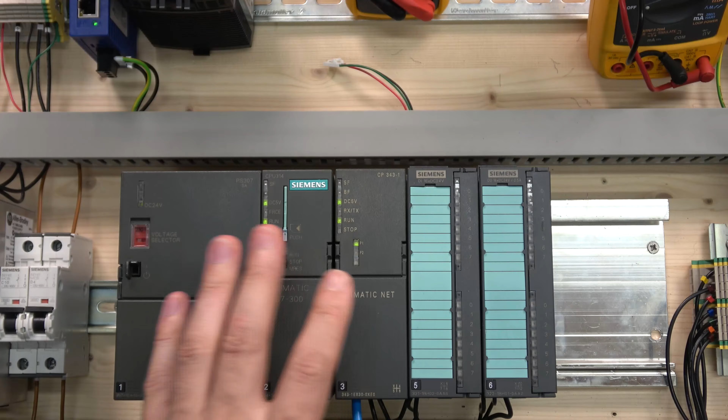Before we get cracking with this in the TIA portal, let's quickly have a look at what the card is all about. This card itself is going to require its own 24 volt DC supply, and it's got 2 ports right here. Both of them work pretty much independently, and can be turned on and off within the TIA portal. One thing you definitely need is your MAC address in here, which you'll be able to read out once you start at the very beginning of the startup.

And this is your version. As you can see, my version here says V2.0. That V2.0 is no longer there because I have already updated this to 3.0, and we're going to be doing one more update in a minute to the latest version, because you have to do 2.4, then you do the 3, and then you're able to do the 3.13 or something like that.

So then you have lights in here. SF is a general group error, so it will pop up with general group issues. BF is going to be your bus faults and Ethernet interfaces - these will show if there's any problems with the end or setups. Also you have RXTX, which shows you when it's communicating, and run, stop, self-explanatory. P1 and P2, as you can see, P1 is flashing because that's where my Ethernet is plugged in. It's showing you which one is working, which one is not.

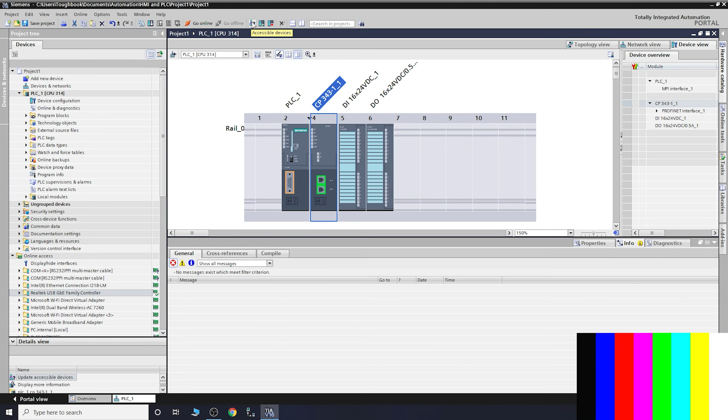We go into accessible nodes right here on the top, click search and find out what the IP address is. As you can see, the IP address at the moment is 172.24.69.221. We're going to be changing that because this is what I was doing on my work - I was working on some of the networking down there. I'm no longer going to need that, so we're going to be changing it in a minute.

Click on show. When you click on show, it will appear right here at the bottom under the online accesses. So in here, just go double click on your diagnostics, and in here you'll be able to find out what the current firmware version is within your CP343 unit. As you can see, mine is 3.0.23. So when you do your hardware configuration right in here, double click on it.

Right here on the bottom, it's going to tell you what you have selected for your hardware configuration. If by any chance your firmware version is not right, just click change the version. I'll show you in a minute how many versions are out there.

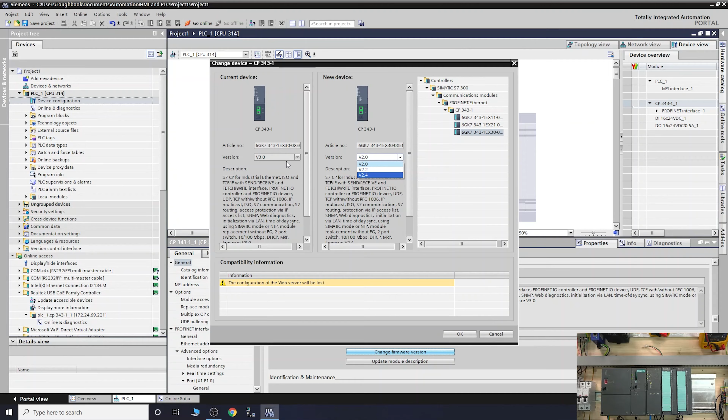There's an option in here. As you can see, mine at the beginning was a 2, and I'll admit I made a mistake - mine was at 2 but I had actually selected 3, and all my ports were locking out all the time. They were not working properly, and I had all sorts of problems until I figured out I completely forgot to make sure the firmware version is correct.

So don't forget it. Once you want to update it, you can just click OK and it will update it. At the moment we are on firmware version 3.0, which is correct. So we are good in here.

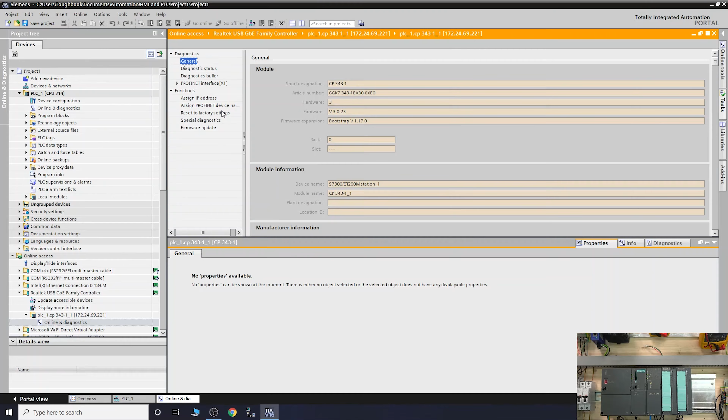Next, if you go into online access and online diagnostics, right in here you can do firmware update, which you're going to do in a minute. You can do your factory resets and everything you want, and also you can assign IP. When you assign IP in here, it's good only for the very beginning. I usually do this at the very beginning and don't do it again, because it's advisable to change your IP address within the configuration itself, which is right here.

So if you click on general... where do we go? We clicked the wrong one. So if we are in here, then our Ethernet address is down here. This is pretty much the Ethernet address down here.

So edit your address in here. That's what we're going to do now. This is preparation for the next video as well. 168, because we're going to be setting this up so we're able to connect. This is what this card is really brilliant about. Once it's fully set up and integrated within your network, obviously you do need to make sure there's all the protections and things like that in there as well.

So which you can - where is this? Somewhere in here, I can't remember, but you do need to put passwords onto your program so nothing can be changed. Let's give him subnet 2, let's give him an address no one's using, to make sure your address isn't conflicting with anything else. If it does, you will have a BF error coming up, and also an SF error, saying it's conflicting, and you'll have a bit of trouble. So it's good to know what IPs are used.

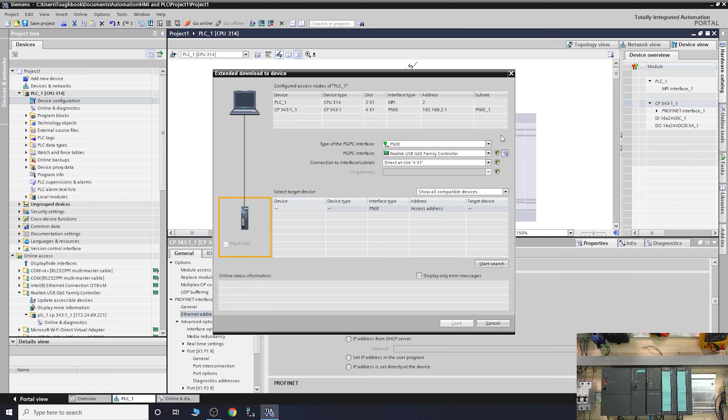I need that one. Once I did that, you're pretty much good to go. So what we're going to do is click in here - we're going to load that new IP address into our card itself. Everything's already selected for me in here. Let's search, and we're going to show all compatible devices, and there's an IP address down here. What it's going to do now is literally override the existing IP to a new one.

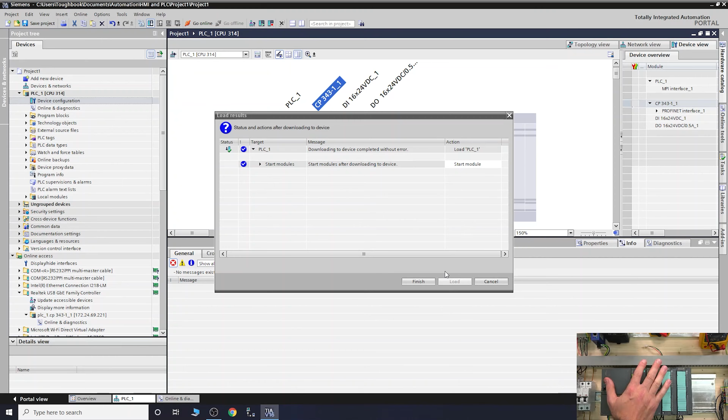Doing his business. Again, my MPI controller is not even connected, so I'm literally communicating with my CPU directly. Let's load that in. As you can see, I haven't done any protection, guys - you do need to select your protections and things like that. Make sure no one, because the one thing that comes with this Ethernet unit is that once it's connected to your network, pretty much your protections aren't there. Anybody can have access to it, whoever's got the software or is online. So let's finish loading that one.

Once we've done that, if you see now, when we go into the accessible nodes and search, it is 192.168.2.1. If you had changed it there at the very beginning and forgot to change it in configuration, it will automatically override whatever you did at the very beginning. So do check this out, because this card now is effectively ready to go - it's all set up, and in here you can start setting up all the small details.

Again, all of this is very much dependent on your setups and module access protection level. Status independent, I don't even know what that is, but we're not going to check that one. Oh, it's doing... you don't want that one.

So the one in here, what you can do is... okay, there's so many different things you can do with it. So interface options, guys, do check it out yourselves. I want to show you something. Where was it? I completely forgot. Where is it?

IP access protection: here you can select the addresses who's able to connect with what kind of IPs and all sorts of things like that. So that's that kind of thing, more or less for the more static IPs. So yeah, all this I'll let you guys check out.

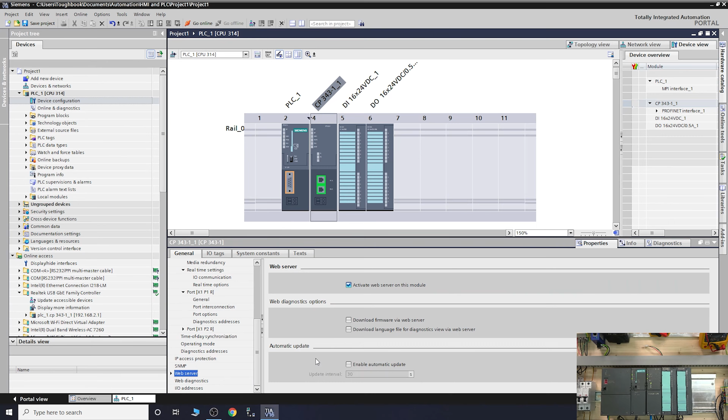The next thing we're going to do is when we go on the web server, which you're going to be checking out in the next video. There's a couple options: activate web server on this module. Web server is really good if you want to connect to the actual CPU and have a look at the diagnostics and all other business you want to do. I can show in the next video. You can even do it from your tablet or your phone. We'll check that out in the next video.

Then you can actually download firmware with your web server. I'm not going to select this now. Actually, I will. Actually, we will select that, because we'll check that out in the next video as well. Come on, here we go. And then automatic - we're not going to do that either.

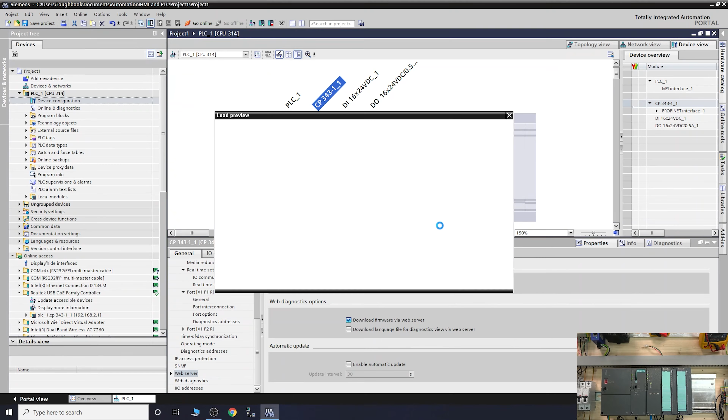So once we've done that, because I did that, I'm going to load that in now again. Come on, again it's giving me a warning saying that I haven't set up any protections. I know, not for this video. It's fully up to the individual how they set up the protections, how to protect their CPUs. So this is just a demonstration of what the card itself is.

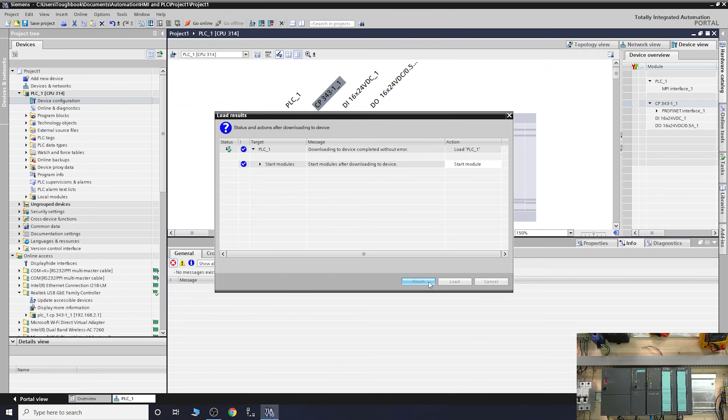And when you want to set this card up, what I'm going to do now is plug my ethernet in, my internet in, and I will unplug my cable from... actually I can't do it because I can't reach to connect it to the network, so we're not going to do that now. We're going to do that in the next video. Because I would need to connect the actual card itself to the actual network, which at the moment my network is a little bit too far.

So next up, let's do the firmware update, because that's the one thing I want to do. And for that, we need to go into Google. Once that is done, let me just see, make sure we are still recording. We are. Was that done? So we're gonna do it. It's gonna be a CP... what is it called?

CP343. It's always good to update your cards, guys, because there's a lot of things they add and sometimes they remove, but it's always good to update them to the latest whatever they've done. So once you find your product, which this is my product, it's quite easy to find. This basically will take you to the Siemens Mall. In the Siemens Mall, we are going to go for downloads.

For whatever reason, we have wireless. That is actually... I still can't connect. We'll check that out in the next video. I literally now can unplug my CPU because I am part of the network. I should be able to connect even wirelessly and do all my stuff that I need.

So what I'm going to do, I'm going to click the downloads in there. I think, do I have it? Do I have it? Do I already have it?

Yes, I already have it, because I was going to pause it since I have to go through the acceptance terms and all that. So basically you download it right in here.

So if you download firmware, click in here. We are using the standard version, yes. Already downloaded, so go through this process and download this file. You're going to get this file right here, which is a CP3 file. We get it as a zip file. So in this folder, I'm going to remove the old one, which was the last update I did.

By the way, you can do this via the web server too. We're going to check that out in the next video.

So we're going to drag these two files right in here. I'm trying to do this as fast as I can. Hopefully you guys are keeping up if you're doing the same thing.

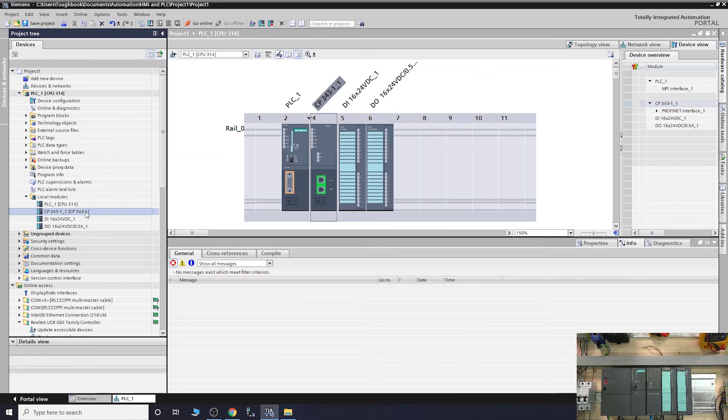So then we're going to go into the accessible devices again. We have to connect to it. Actually, can we do it right down here? I'm not sure, because I've already done it. Local modules, CP - let's right click on it, then go into diagnostics. So there you go, we can do it through here.

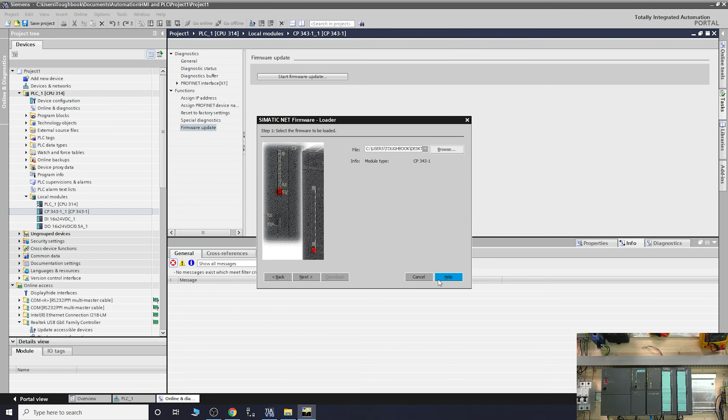So then we go to firmware update, start firmware update. Make sure you are offline, because it doesn't like you being online. So let's browse and find the file we are looking for. That's the one, we click it, then click next.

Is that our MAC address? Yeah, that's it. So then we need to select how we are talking to this device, which is my family controller. And then we go into download. If all goes well, it's going to create the hardware version.

If all goes well, it's going to go straight into the loading segment. From there on, let me pause here and let it do all of its business. It could take about 4 to 5 minutes while it does the full update now.

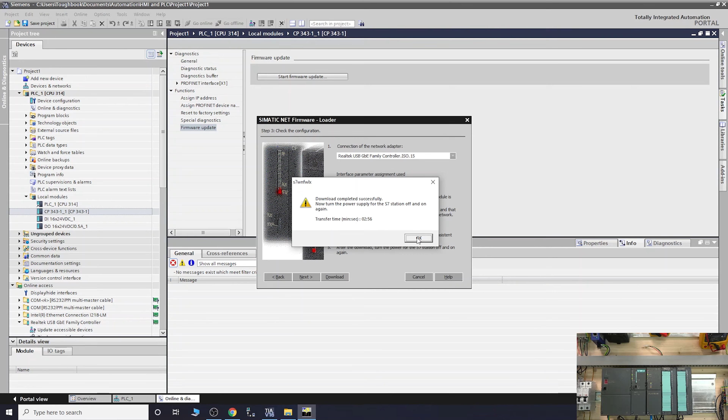Here we are, so once that's done, you're going to see a message like that. If all went well, you'll see 'download complete successful.' It tells you to turn the power supply of the S7-300 off and on, basically reset the system. So let's cancel that one out.

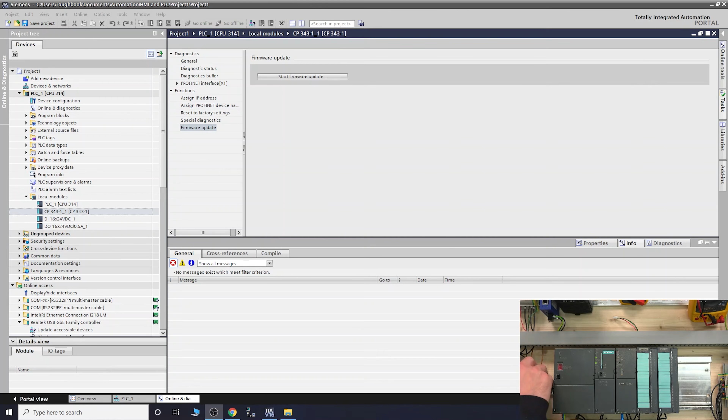Let me drag the screen here so you can see the system flashing down there. It's requesting a restart. So shut it down, there you go, and put it back on as it does that.

So we quickly want to check - there's one thing I didn't check. Do I need to change the configuration in my device as well? Let's double click on that and go into general settings. Let's go down - I don't think you do, because I don't think there was any more.

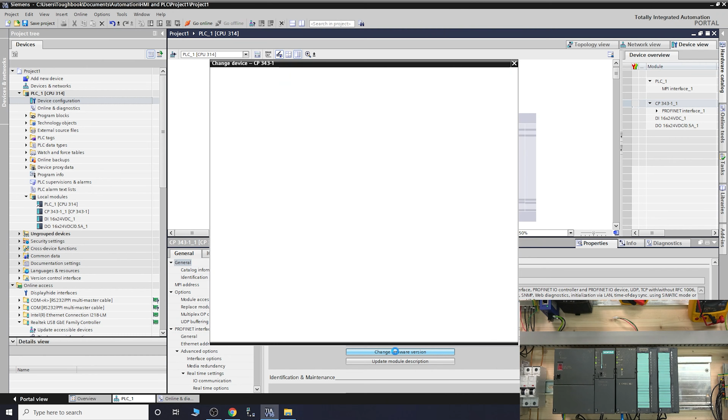So change the firmware version to 3. Now we're good, you don't have to change anything. So past 3, that's it - I think that's the last one on the 3.

So yeah, there we go ladies and gentlemen, this is how we updated the firmware version. The system is all healthy, ready to rock and roll. So let's go online and make sure everything is singing and dancing. If everything works well, everything should be in green.

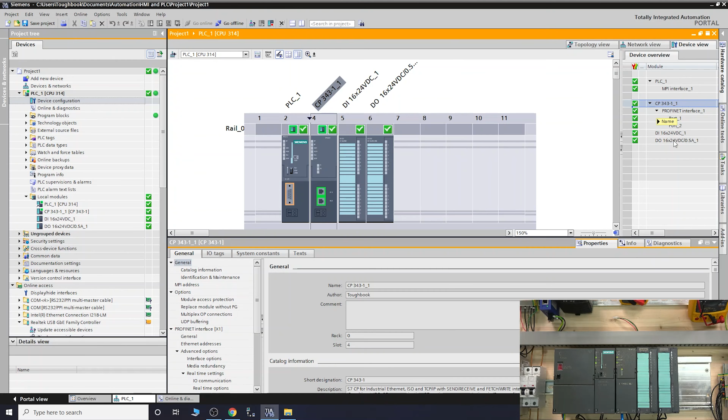Come on, do your thing - it's taking its time, come on. And there we go. So everything should be, if you look at the Profinet, both of the ports is good, reachable, all singing and dancing. There we go ladies and gentlemen.